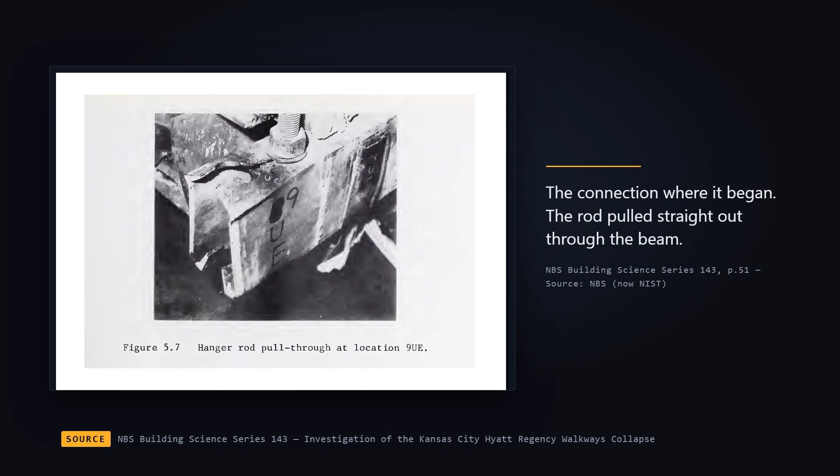This is a piece of steel from a hotel lobby in Kansas City. Investigators wrote 9UE on it in marker because that is where the collapse started. Two walkways came down into that lobby on a Friday evening in 1981. 114 people died. You have probably heard why.

During construction, a drawing was changed. Almost every telling of this story stops there. And the report does say it, that's Conclusion 6. Now read the next one, one line further down the same page. Conclusion 7: the connection would not have satisfied the building code under the original detail either.

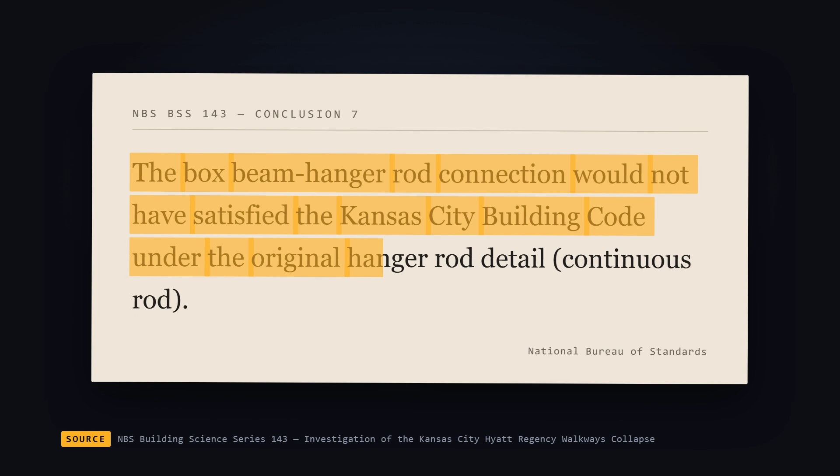The drawing that was replaced was already short of the code. The change made a failing connection worse. The Bureau put numbers on both halves. The connection that failed was carrying 31% of what the code expected it to hold. Without the change, it would have been about 60%. Better, still not enough. Start with the evening.

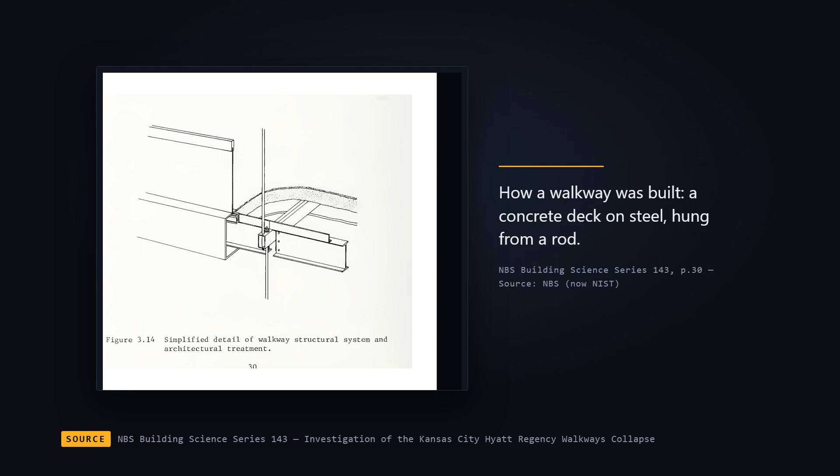The hotel had been open about a year. Its atrium was a room roughly 117 feet by 145, and 50 feet high. Three walkways crossed that open space at the 2nd, 3rd, and 4th floors, hanging from the roof framing. On Friday, the 17th of July, the hotel was holding a tea dance.

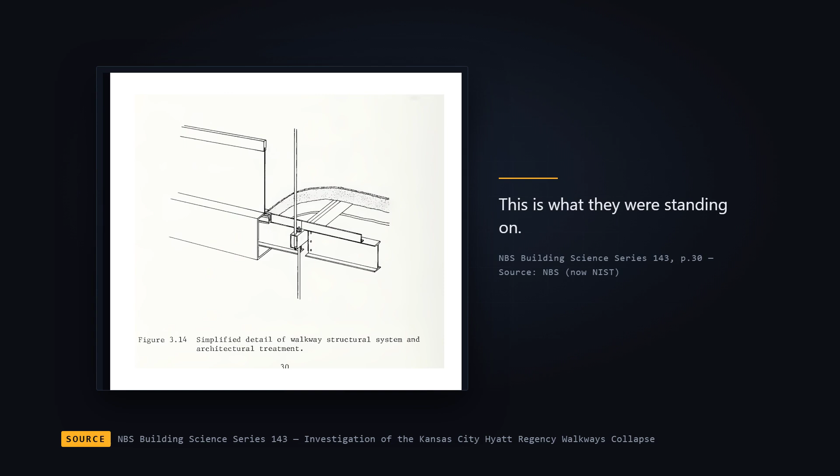People began arriving at 3 in the afternoon. By 4:30, the floor seating was full, and people began to gather on the walkways to watch. By 7, the crowd in the atrium was estimated at 1,500 to 2,000. Here is the next minute, as the Bureau recorded it.

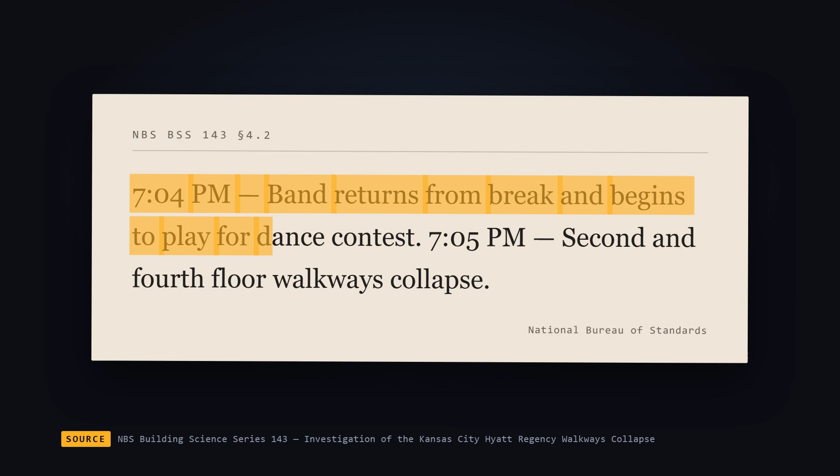7:04: the band returns from break and begins to play for the dance contest. 7:05: 2nd and 4th floor walkways collapse. The 4th floor walkway fell onto the 2nd floor walkway, and both landed on the lobby floor. Most of those killed were on the lobby floor or on the walkway below.

The first call for help reached the fire department 3 minutes later. 7 ambulances were on scene by 18 minutes past. Within an hour, there were more than 100 firefighters and emergency workers in the lobby, and a call had gone out for cutting tools. The walkway spans were too heavy to lift by hand. A crane arrived at 8:30 and was moved into position inside the atrium.

The last survivor was pulled out at 4:30 the next morning. The last span was lifted at 7:45 that morning. 31 bodies were underneath it.

So what was the change? As approved for construction, the drawings called for one continuous rod. It attached to the roof, passed through the 4th floor beam, and carried on down to the 2nd floor beam. Follow the weight: the 2nd floor hangs on that rod, and its load travels up past the 4th floor beam without ever resting on it.

What was actually built used 2 sets of rods, one from the roof down to the 4th floor beam, a separate one hanging from that same beam down to the 2nd floor. Now the lower walkway does not hang from the roof anymore. It hangs from the walkway above it, which means everything below has to pass through the 4th floor connection on its way up, both walkways, through one nut. That is what the Bureau meant by essentially doubled.

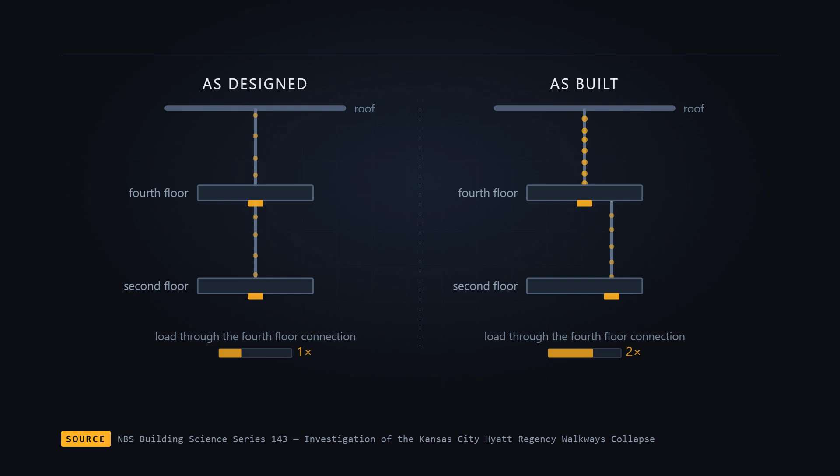And nothing about that is obvious from a drawing. The pieces look almost the same. What changed is invisible. It is the path the weight takes.

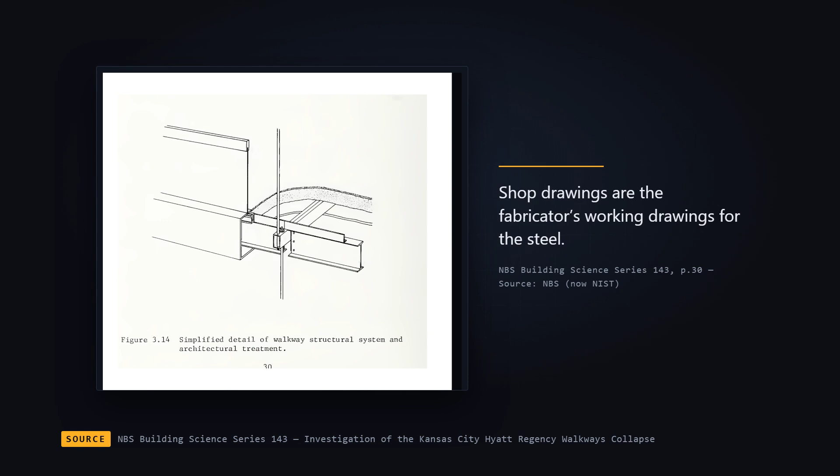None of this happened quietly. The change appears on shop drawings, prepared during construction by the steel fabricator. And the report notes who signed off on them. Three parties looked at the drawing that doubled the load and stamped it.

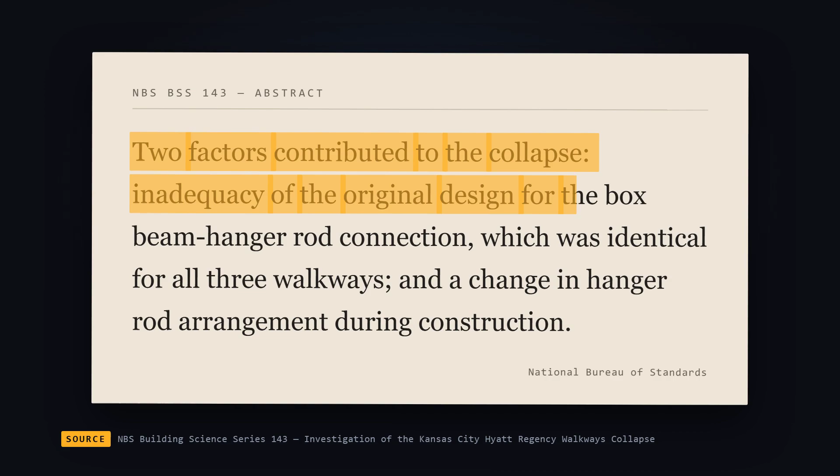Now the half of the story that usually gets left out. The Bureau listed 2 contributing factors, not 1, and it put them in this order. Inadequacy of the original design comes first. And note the clause after it: that design was identical for all 3 walkways.

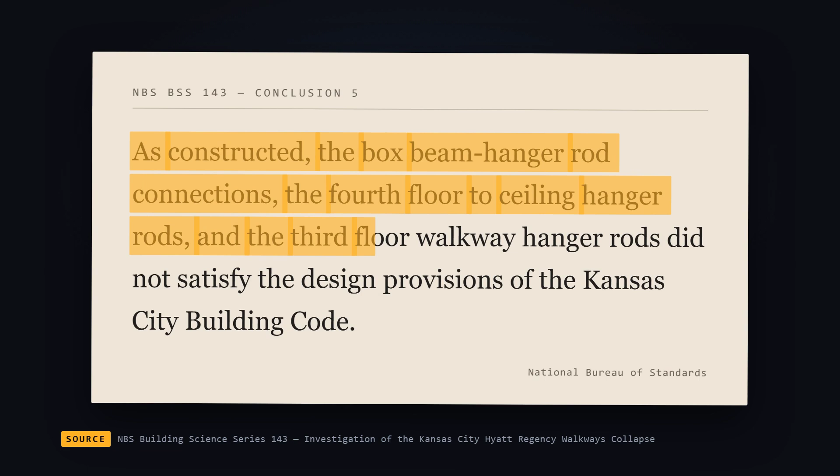Which leads to a sentence that is easy to read past. Conclusion 5: as constructed, the box beam connections, the 4th floor hanger rods, and the 3rd floor walkway hanger rods did not satisfy the building code.

The 3rd floor walkway did not fall. It was never part of the collapse, and it was also below code. To be fair to the drawing that was replaced, the Bureau also said this.

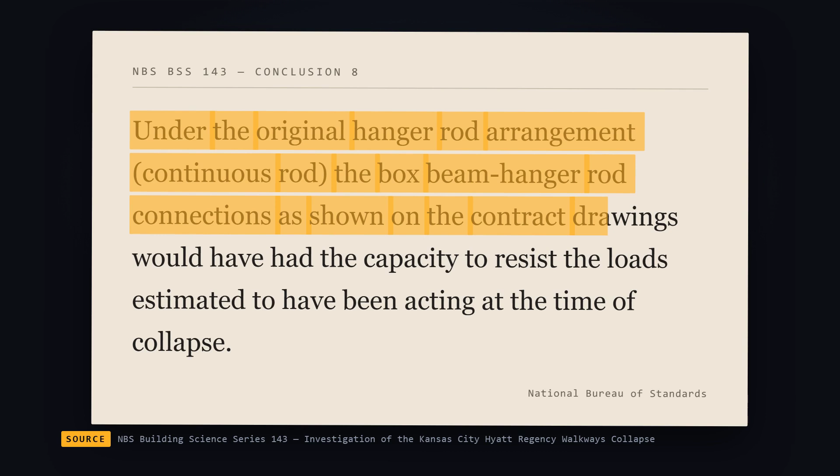Conclusion 8: so both things are true. The original design would have held that night, and the original design was already below the code that was supposed to keep it standing on every other night.

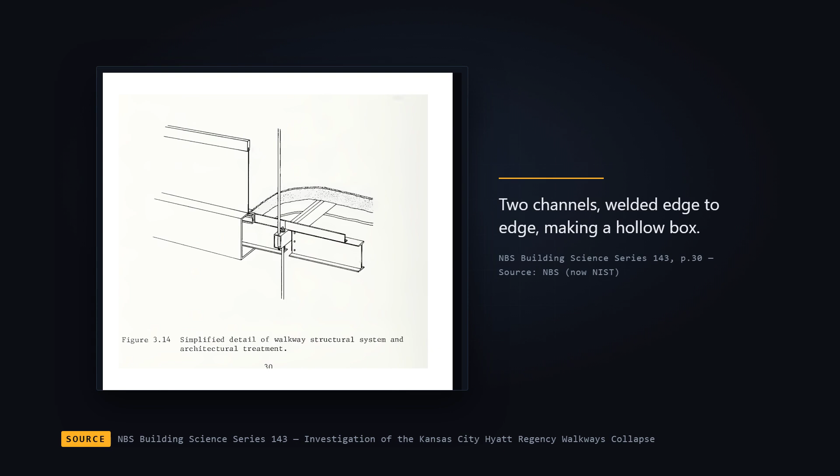The failure itself took almost no time at all. A box beam was 2 steel channels, 8 inches deep, laid facing each other and welded along the seam where their edges met. The rod passed through a hole drilled in that box, and a nut and washer underneath held the whole walkway up, which puts the entire load onto the strip of weld running between those two channels.

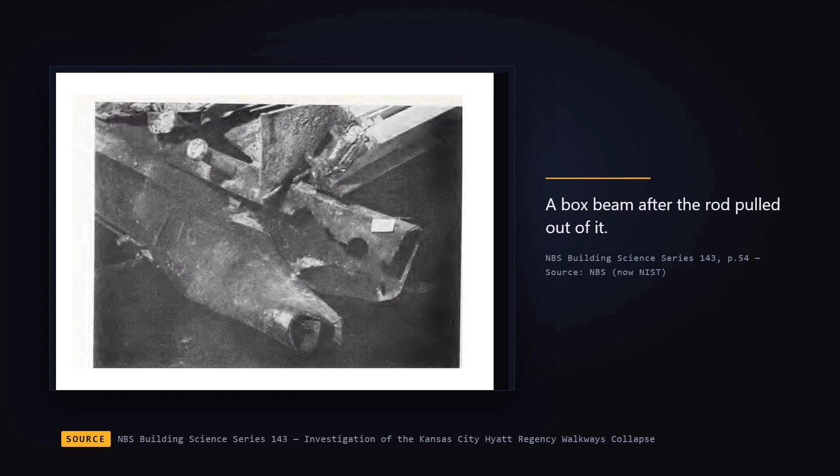The Bureau found the rods had pulled through both flanges of every box beam in the fourth-floor walkway. The flanges bent upward, the steel yielded along the fillet line, and the weld fractured back past the rod hole, and the scraping on the metal showed the washer had not gone through in one motion. It slipped, caught, and slipped again.

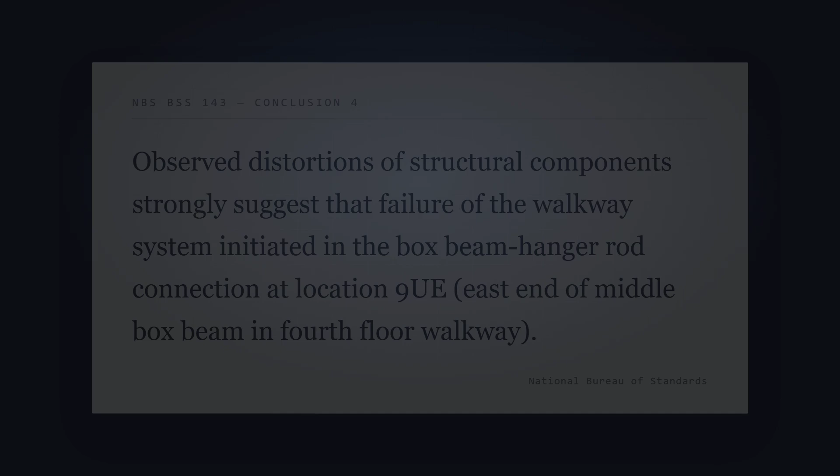The Bureau could not single out one weak connection, and said so. It could say where the failure started, from how the steel was bent. Observed distortions strongly suggest the failure initiated at the connection on the east end of the fourth-floor walkway's middle box beam. It is worth saying how any of this was established.

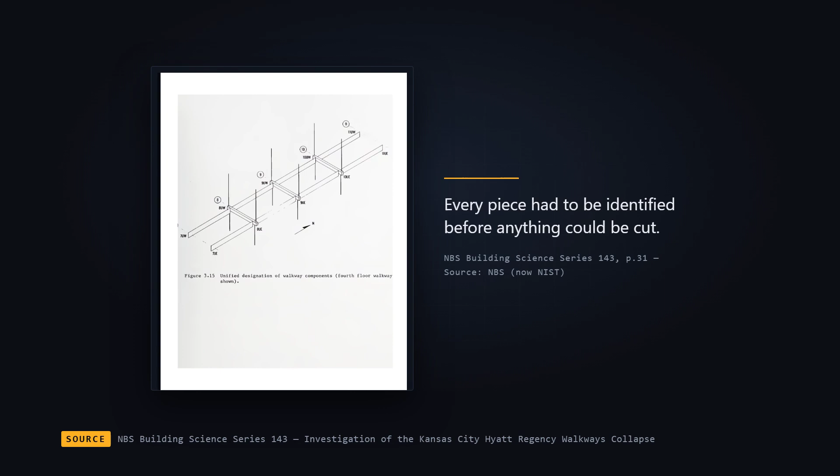The city asked the Bureau of Standards for help 3 days after the collapse. Its researchers arrived on the 21st of July, and at first they were not allowed to touch anything. To weigh the spans and to cut pieces out of the box beams and rods for testing, the Bureau had to ask a court. Permission came only after the parties suing each other agreed. The wreckage was evidence before it was ever a specimen.

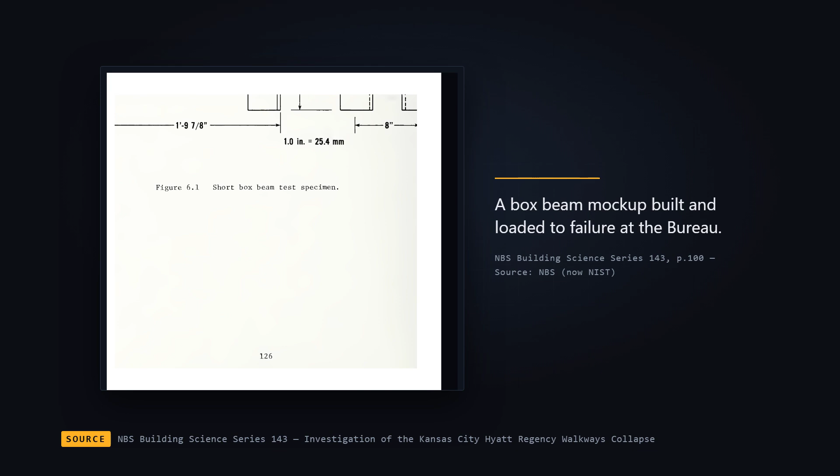Once they had the steel, the Bureau built mock-ups of the connection and pulled them apart in the laboratory. Cutting the test welds open showed how little of the seam the weld had actually reached into. One thing the tests ruled out, and it matters: nobody welded it badly, nobody supplied bad steel. It was built more or less the way the shop drawing said to build it.

One more number, and it is the one that stays with me. A television crew had been filming the dance. From that videotape, the Bureau counted the people who were standing on the two walkways. 63 people, that was the load. The walkways themselves weighed about 8% more than the drawings implied.

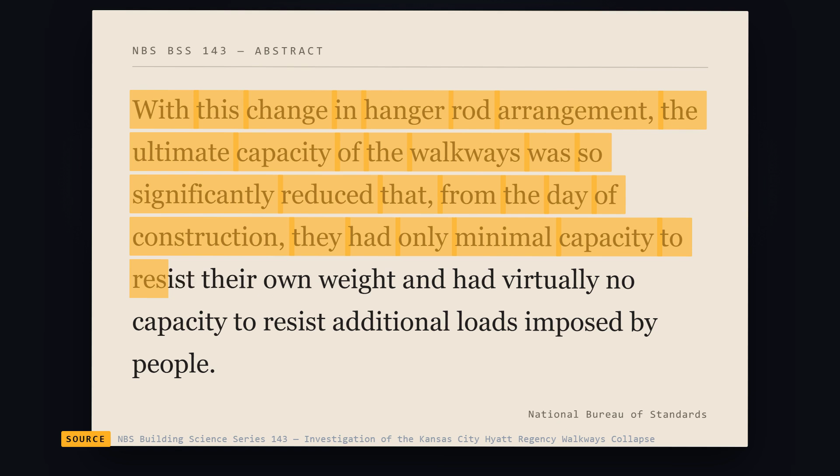That was the only other surprise, which produced the Bureau's first conclusion, and then the sentence the whole report is really built around: with this change, the capacity was so reduced that from the day of construction the walkways had only minimal capacity to resist their own weight, and virtually none to resist the loads imposed by people. From the day of construction, not from the night of the dance. The hotel had been open for about a year before anyone stood on those walkways in numbers.

A word about what this report is, because it is easy to read it wrong. The Bureau of Standards was asked by the city to determine the most probable cause. It is a technical finding. It does not assign fault, and it names no one.

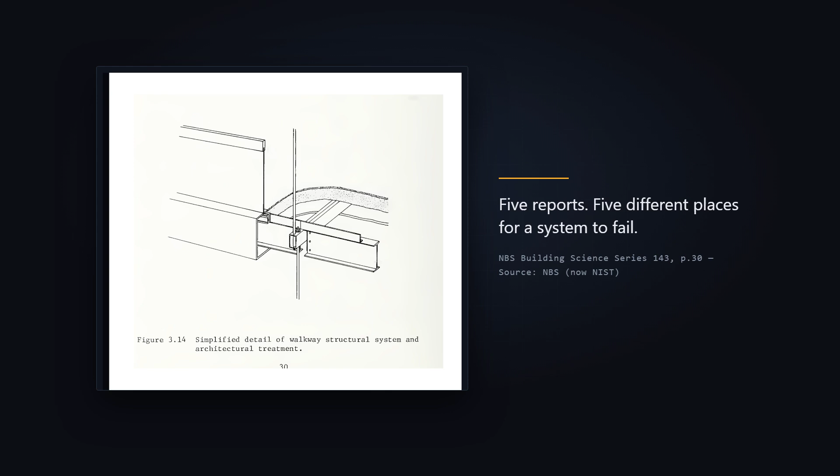We have made 5 of these now. A ship went over because a man typed a wrong number. One because the number in the book was wrong. A boat sank because a warning was written and declined. A pipeline burst because the record described a pipe that was never there. This one is different again.

The drawing was changed, and the change was reviewed and stamped and built. What nobody did was work out what it now had to carry. And underneath that, the thing almost nobody repeats: the drawing they replaced would not have passed either.